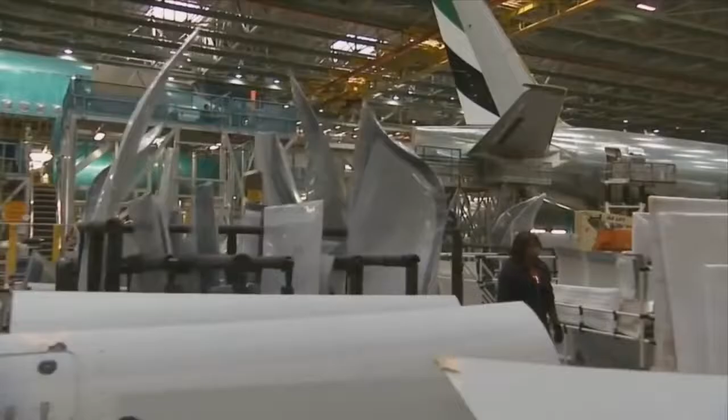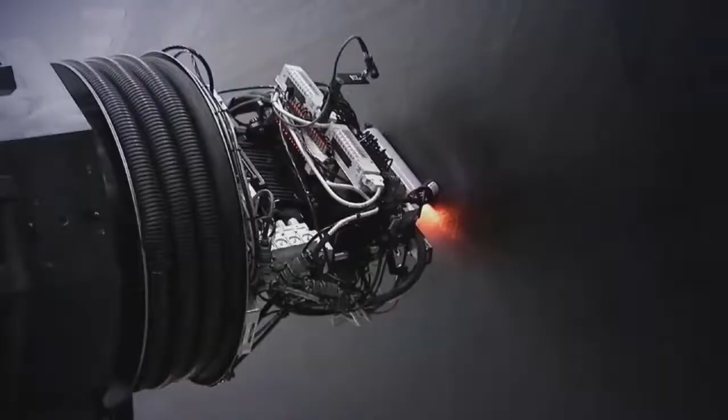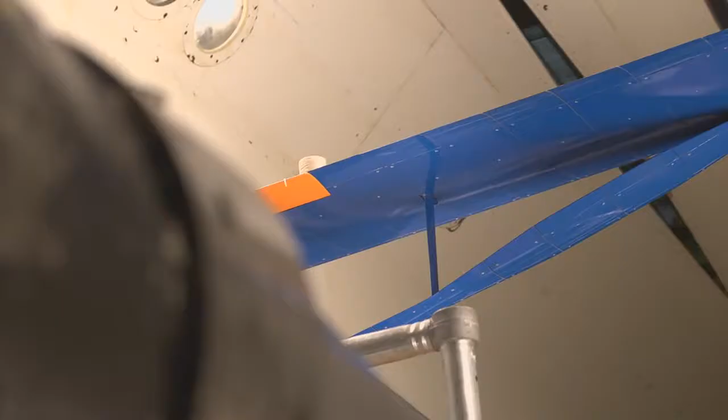With this commendable record, it would be easy for aircraft manufacturers to rely on the status quo and continue to build the same types of safe, efficient, and dependable aircraft for the foreseeable future. But the status quo just won't do. Changes in technology, materials, and scores of other areas continue to unfold that will make future aircraft better in virtually every way. These changes won't come easy, though. Researchers in both the airline industry and government spend years looking over new designs and ideas to make sure that they will work perfectly.

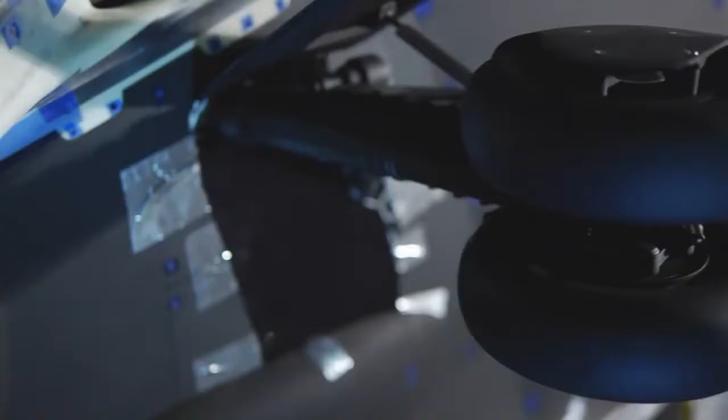This collaboration between industry and government is important because government researchers can help mature new ideas that will eventually be picked up by its industry partners. But if aircraft are already this good, what areas need to mature to make them even better?

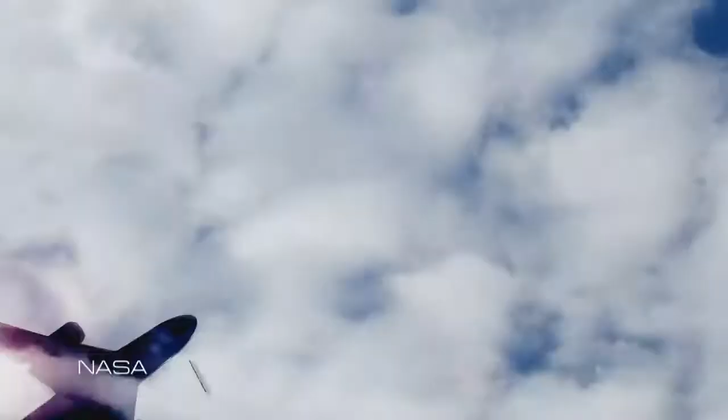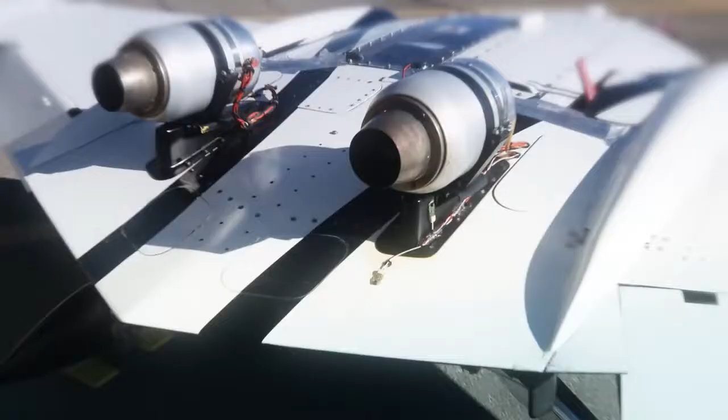Today on NASA X, we will see how industry and NASA are working together to make aircraft quieter, greener, and more fuel efficient. We will follow members of NASA's Environmentally Responsible Aviation Project as they work with industry engineers to develop the aircraft of the future that are substantially different in form and function from the aircraft that we fly on today.

If you were to book a flight today and there were multiple options for airlines to go to your desired spot, generally what would be the key decision point for booking that particular flight? For many of us, the deciding point would be cost. There are certainly other factors that would go into that decision, but more often, cost wins out over other concerns.

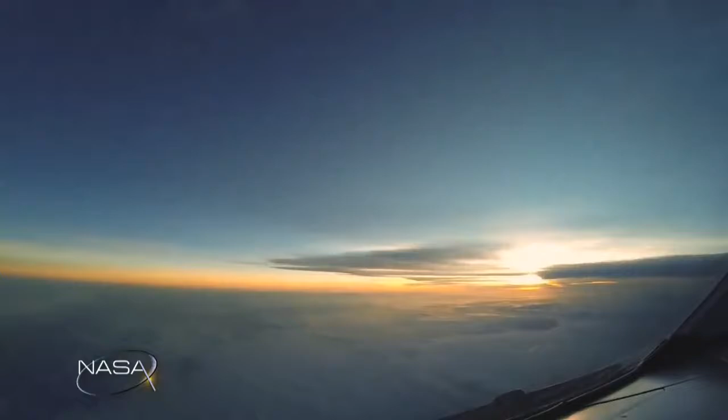Clearly, the airline industry is a business, so keeping costs down to lure more passengers is a huge driver. Airlines are very good at understanding the economics of flight, but one of the biggest fluctuating costs comes from gas prices. If gas prices go up, then generally ticket prices rise as well. One clear way for airlines to combat big fuel bills is to fly aircraft that are more efficient and use less fuel. And theoretically, ticket prices should go down as well.

This push and pull has been going on for years. Though it may not seem like it, flying today is dramatically less expensive than it was even a few decades ago. Adjusted for inflation, a ticket today will cost on average about 40% less than a ticket would have in the 1950s. There are many reasons for this change, but one in particular is that aircraft of today are significantly more efficient than those of the recent past and are continuing to improve every year.

With that efficiency, there are added benefits as well, like reduction in air pollution and noise pollution, and even an increase in safety.

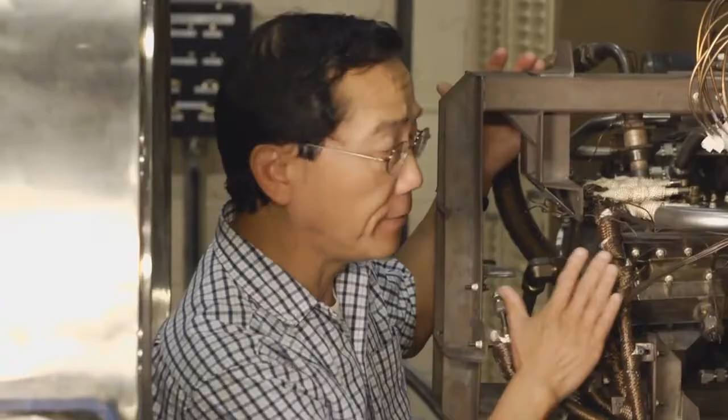To help keep this trend moving forward, NASA made steps in 2009 to continue its place as the world leader in the study of efficient aircraft. They implemented a project called the Environmentally Responsible Aviation Project in a bid to explore aircraft concepts and technologies that will continue to reduce the impact of aviation on the environment over the next 30 years.

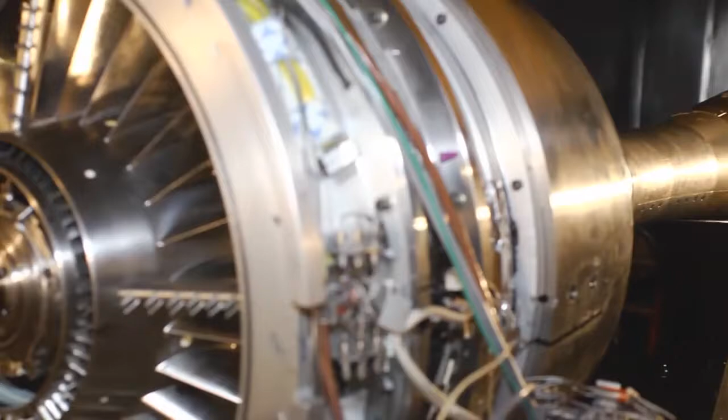During the first 3-year phase, engineers assessed dozens of areas of environmentally friendly aircraft technologies. With these assessments in hand, they then took some of the most promising technologies and began looking at how they would react in a real-world environment.

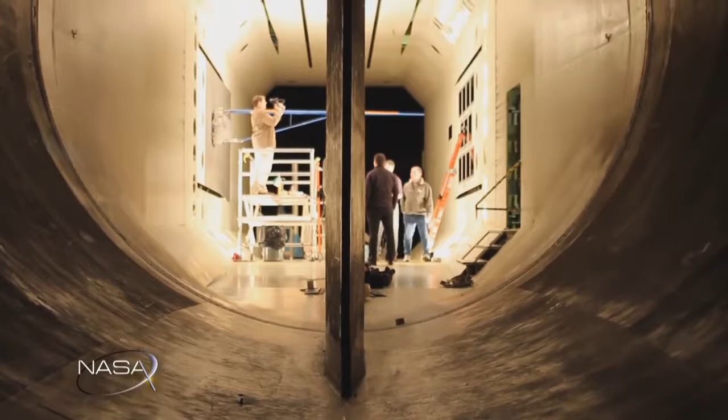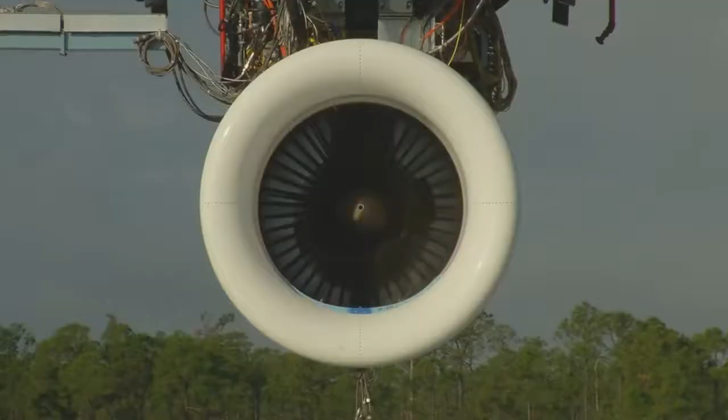Some of those experiments included non-stick coatings for low-drag wing designs, laboratory testing of a new composite manufacturing technique, advanced engine testing, and test flights of a remotely piloted hybrid wing body prototype.

After the first 3 years of testing, the verdict was in. The ideas that were studied proved to be incredibly successful in making very quiet aircraft with low carbon footprints.

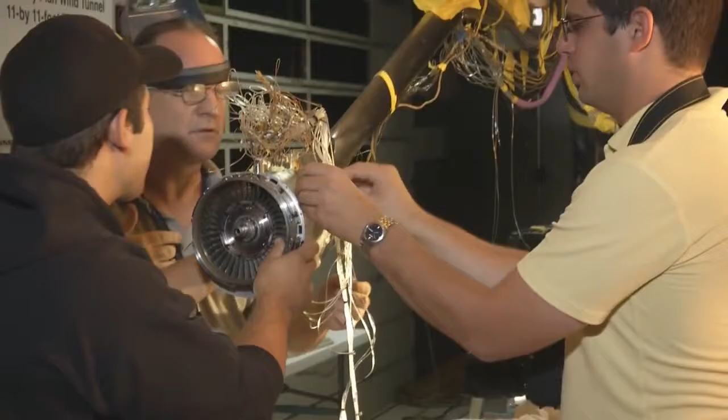The ERA project engineers have taken the valuable lessons learned from Phase 1 and are now beginning to integrate these ideas together to make an even larger improvement in the next phase of testing. In Phase 2, NASA has chosen 8 large-scale integrated technology demonstrations to advance ERA research. The demonstrations are designed to further the project's goals of simultaneous reduction in the amount of fuel used, the level of noise, and the emissions produced by tomorrow's aircraft.

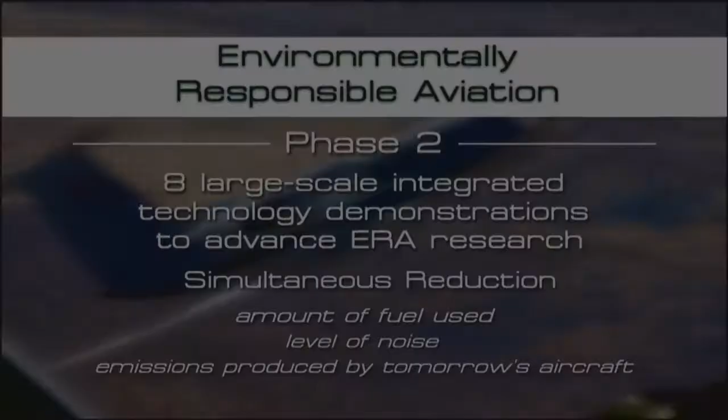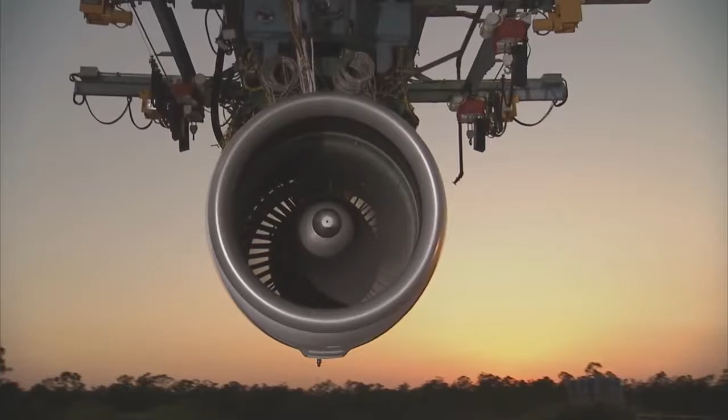Researchers will focus on 5 areas: aircraft drag reduction through innovative flow control concepts, weight reduction for composite aircraft structures, fuel and noise reduction from advanced engines, emissions reductions from improved engine combustors, and fuel consumption and community noise reduction through innovative airframe and engine integration designs.

ERA from the beginning in 2009 had some very aggressive goals relative to fuel burn: a 50% reduction in fuel burn; noise, 42 decibels less than Stage 4 noise; and for emissions, 75% less than the CAEP 6 emission standards, which are international standards. So lofty goals that they've been working at.

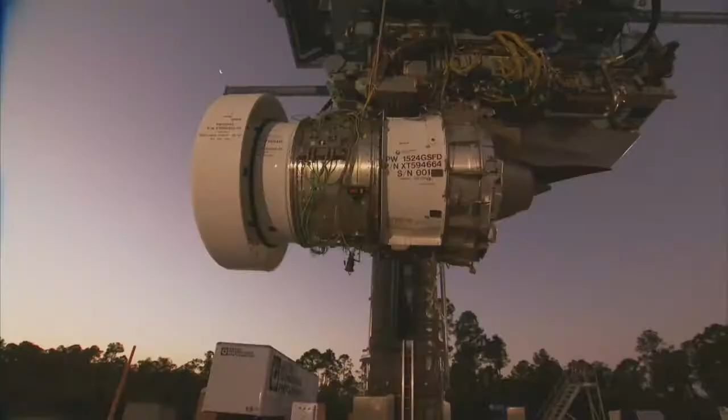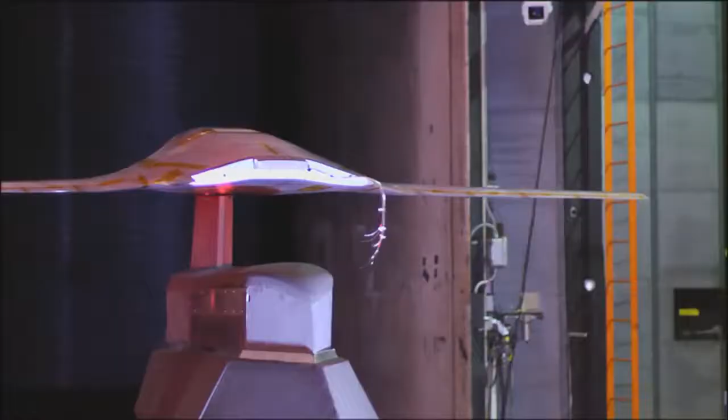And during the first phase, they did a lot of exploratory investigations that could look at all of these technologies working together to see what the probability of outcome would be. So out of that first 3 years' work, they came up with 8 investment strategies, integrated technology demonstrations to invest in. And these aren't aircraft dependent necessarily.

So they could work on something like what we're doing now, doing risk reduction work for a test that will be looking at a blended wing body configuration, a fairly advanced configuration. But many of these technologies will work on current configurations that we see flying right now.

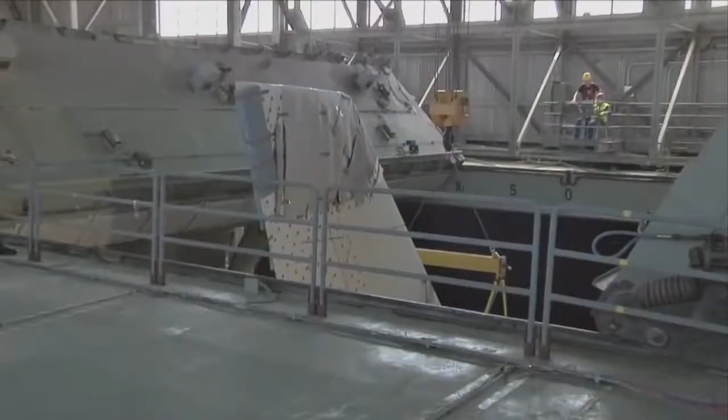Across the street in the National Full-Scale Aerodynamics Complex, we've got a test that would be flown on a 757 Eco Demonstrator. As Dr. Waggoner mentioned, testing active flow control has been completed on the vertical tail section of a 757 here in the National Full-Scale Aerodynamics Complex, or NFAC.

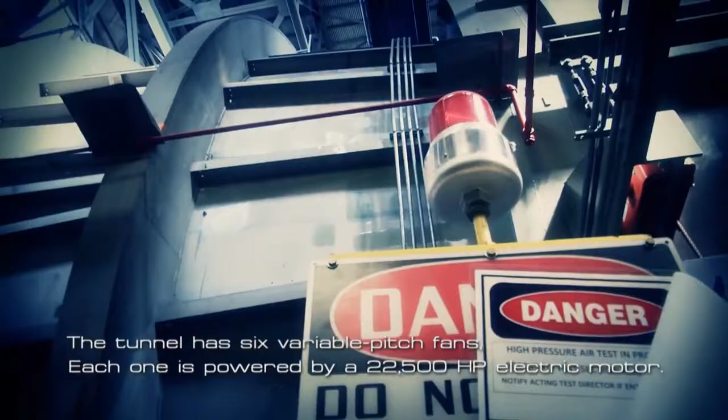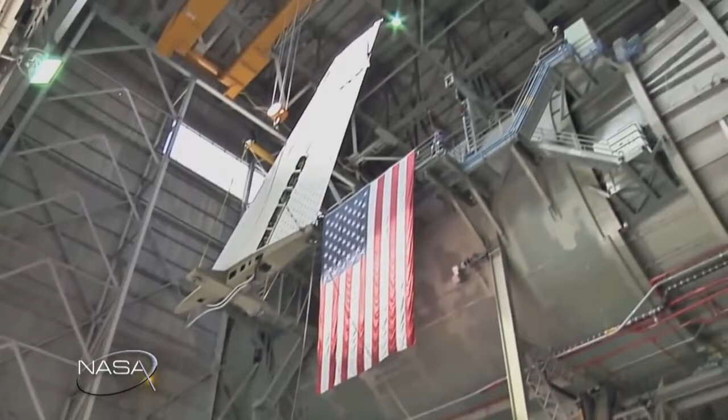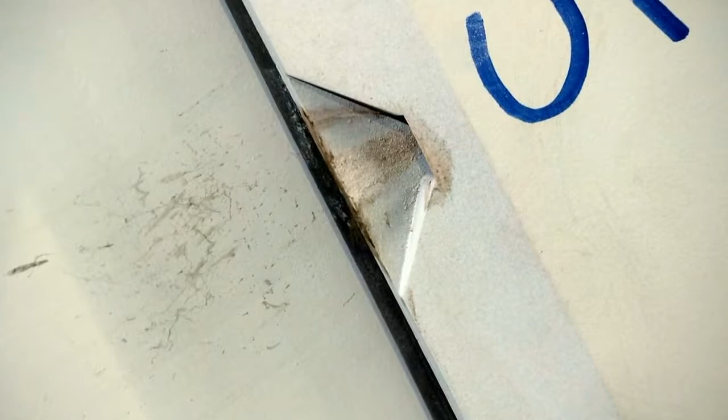The NFAC is the largest wind tunnel in the world and is uniquely qualified to test full-scale configurations like this. This vertical tail section was taken off of a Boeing 757 and fitted with active flow control jets before it was brought into this facility. Now that it's here, researchers can begin the hard work of understanding if this unique technology is viable on aircraft.

To understand what is being tested, let's first look at how the tail section of an aircraft works. Here is Boeing's Ed Whalen to explain.

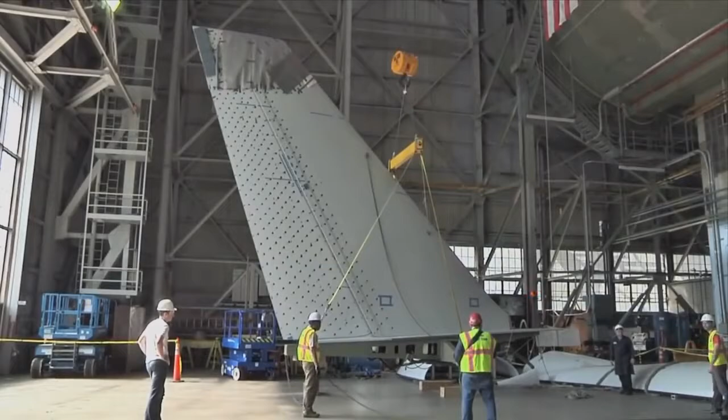So the vertical tail on a commercial aircraft serves several purposes. The purpose that we're focused on here is dealing with the situation when there's an engine failure on the aircraft. It turns out that the vertical tail is sized largely because of this engine failure condition. And so when the engine fails, in like a twin engine airplane, there's a large thrust asymmetry because one engine will be at high thrust and the other engine will be at 0.

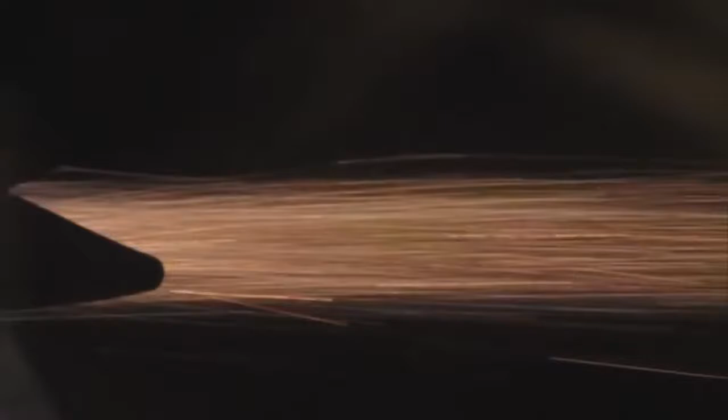And the rudder and the vertical tail is there to straighten the airplane out in that situation. So take out that asymmetric thrust, the moment that that asymmetric thrust creates, and allow the airplane to fly straight and land straight on the runway. Most of the time, the airplane is carrying around this vertical tail that is really sized just for this one situation where the engine fails.

It's a very improbable circumstance for commercial aircraft. So all that time that you have that vertical tail, it's sort of a penalty that the airplane pays to carry this around in the case that this emergency happens.

So the idea is that if we can add the active flow control in, we can reduce the size of the vertical tail. And so we're not carrying around that extra penalty of this bigger tail. We're carrying around the right size tail for normal aircraft operation, and we're turning on the active flow control in an emergency situation or in another situation where high vertical tail or rudder authority is required.

As Ed mentioned, commercial aircraft are designed with a large vertical tail and rudder for maneuverability and an emergency engine-out scenario. Because engine stalls are such an infrequent occurrence, the weight of such a large rudder makes the aircraft less efficient. The basic principles of flight include lift, drag, thrust, and weight.

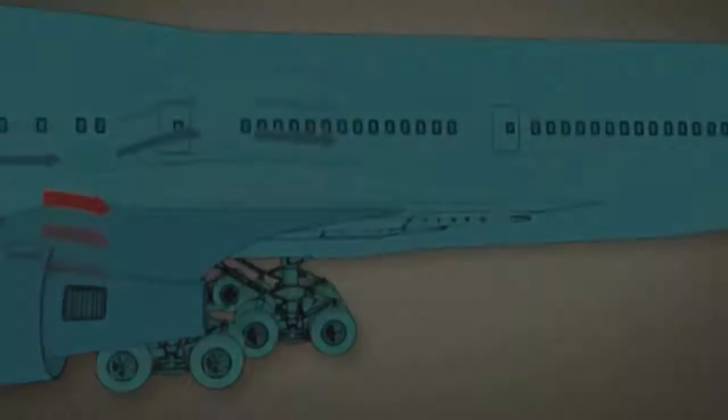In order for an airplane to fly, thrust has to equal drag, and lift has to equal weight.

If you can reduce unintentional drag, then you can make your aircraft more efficient. But the plane still has to operate with an emergency engine-out procedure.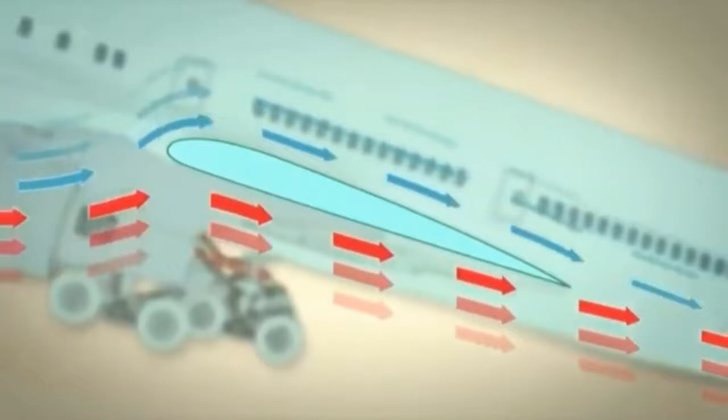Smooth air must flow over an aircraft's surface for it to perform optimally. Researchers have added active flow control sweeping jets to ensure that sufficient air is flowing over aircraft surfaces.

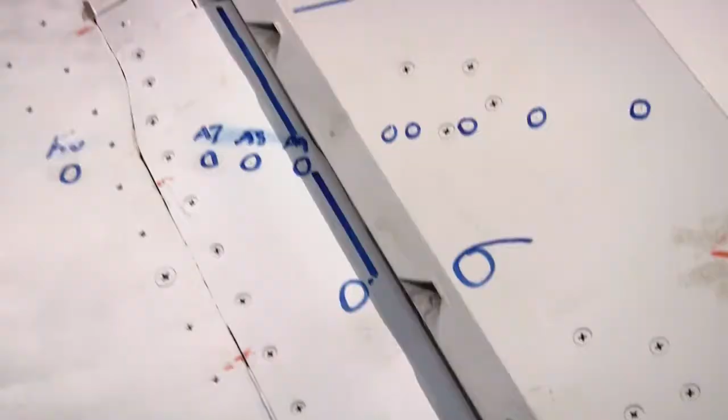What the active flow control tries to do is add energy to the flow, in this case through the sweeping jet actuator, and when it does that, it reduces the separation on the rudder. So when the rudder is at a high deflection angle, like 30 degrees, it starts to experience some flow separation, and that reduces its ability to create aerodynamic force. So what we do is add these jets in the right place with the right spacing and the right mass flow levels, and that reduces the separation on the rudder and allows the tail to provide its maximum potential aerodynamic force.

What we're using to generate this effect on the aerodynamics around the tail is something we call sweeping jet actuators. The way they work: pressurized air comes in, and then it flows through. There's a feedback channel that makes the jet oscillate as it comes out of the nozzle. On the model here, you can see these jets are positioned along the rudder hinge line.

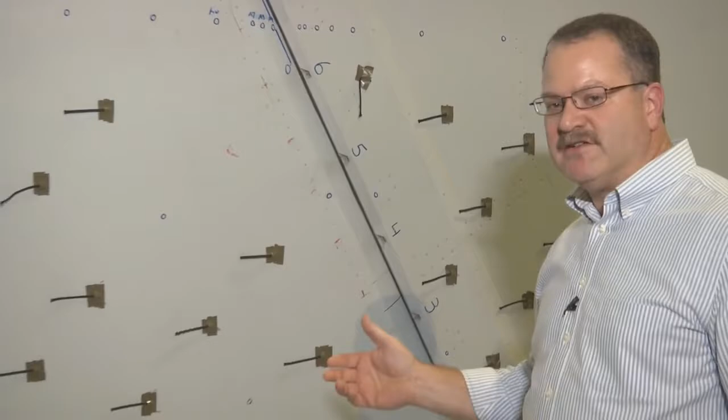The air comes through there and flows, making the effect we're looking for to cause the change in side force. The string taped on the rudder helps show what direction the air is moving as it moves over that surface. Since we can't see the air itself, this is a way to visualize what's going on.

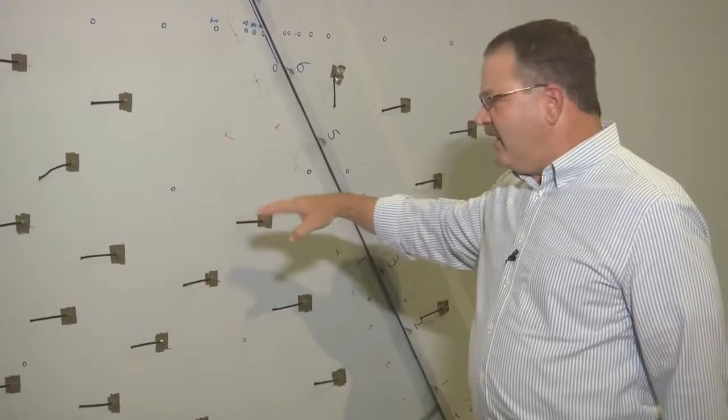As we turn on the actuators, you'll see these change direction. Near the actuators, they'll oscillate because the actuator itself is oscillating, but also because the flow coming downstream is separated until we turn the actuators on, and then it changes the patterns that you see.

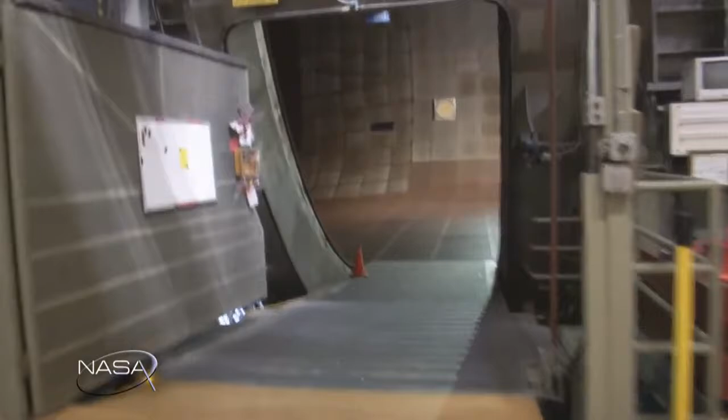Investment needs to be made now to realize these benefits in the future. ERA is set up to really look at ways to help protect the environment. The technologies we're working on in this specific instance will end up causing less drag on aircraft, which results in less fuel burned. That's obviously a benefit in terms of emissions as well as an overall economic benefit for the airlines.

After the analysis was completed, the wind tunnel tests conclusively showed that the goal of a 20% increase in side force was achieved with the active flow control jets.

Research will soon begin to focus on validating these results on actual flight tests in the near future. If you think about it, that's been a full-scale hardware-in-the-loop simulation we've just done. We'll take that hardware and apply it to a 757 that's been leased for this experiment, and we'll go fly it and see if the performance we can demonstrate in flight is consistent with what we measured in the 40x80 at NASA Ames. We're confident it will be, and we're looking forward to the experiment.

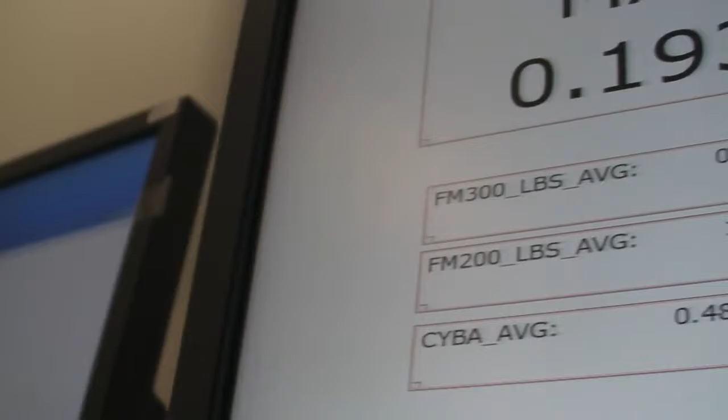So we've seen how testing is performed on full-scale aircraft parts, but researchers also test small-scale and computer models as well to better understand how to improve aircraft performance.

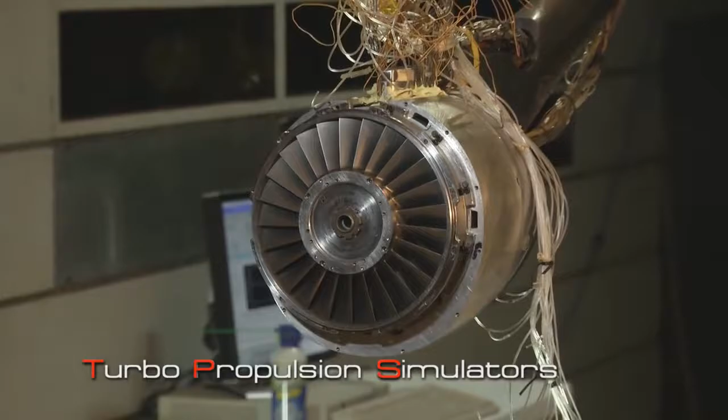Here at the 11-foot tunnel at NASA Ames, researchers are looking at turbo propulsion simulators, or TPS units. The hope is that these tests will help better understand how moving engine configurations may fundamentally change aircraft design, while also making it more efficient. Here is NASA's Kevin James to explain.

One of the big problems with the next generation of airplanes is how do you actually integrate the propulsion system with the aircraft? We call that PAI, or propulsion airframe integration. The problem is the engines have gotten to be so big, which is why they're really efficient, and it's also why they're quiet, is actually their size.

Their size is approaching the tube diameter of the airplanes that they fly on. If you look at a 737 and the size of the engines hanging underneath the wing, they're approaching the size of the fuselage that we ride in.

So a big problem is how do you take these engines and integrate them with the airframe itself? How do you get the airplane to fly as a cohesive unit?

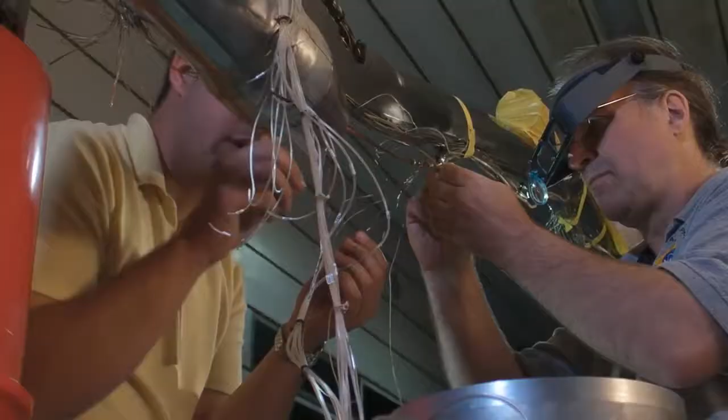One of the problems we're looking at in our propulsion airframe integration problem is an entirely new aircraft concept, where the engines are actually going on the upper surface of the wing. That does a variety of things.

If you look at an existing aircraft, the engine diameters have gotten so big that the only way we can make them bigger is to shove them up into the wing, which causes real problems with how the wing works.

Or we put longer landing gear on the airplane. But if you look at the trade-offs, the cost of carrying the weight of that longer landing gear around for the life of the airplane doesn't actually pay for putting bigger engines on it. So putting bigger engines underneath the wings is a real problem, especially for smaller aircraft.

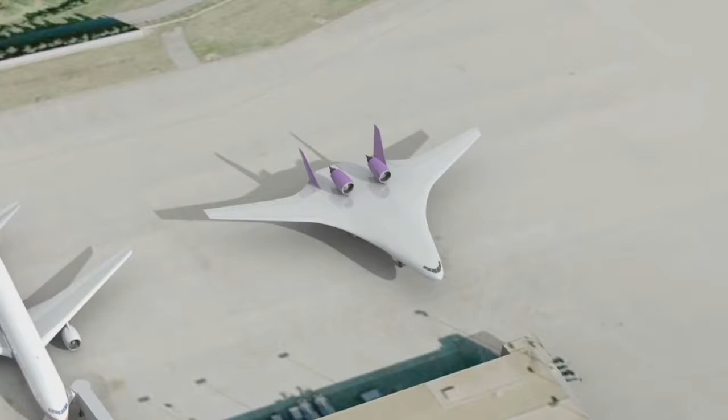So now we're working on putting the engines on the upper surface. The problem is it's the upper surface of the wing that actually does the work that produces the lift that allows you to fly. So if you aren't very clever about how you integrate the engines on the upper surface of the aircraft, you totally destroy its ability to fly efficiently.

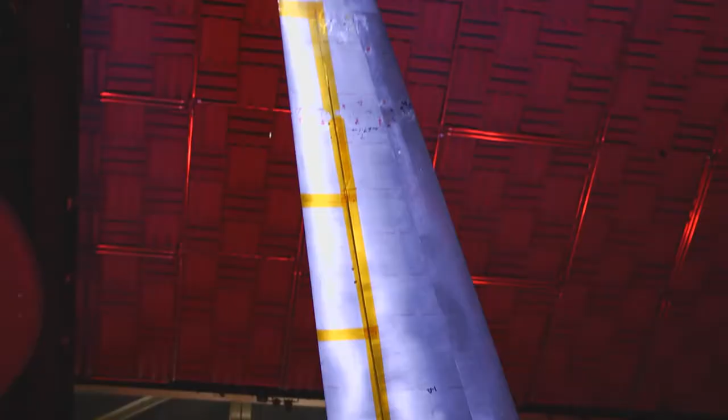Understanding this issue, NASA researchers have been testing hybrid wing-body aircraft that could revolutionize flight.

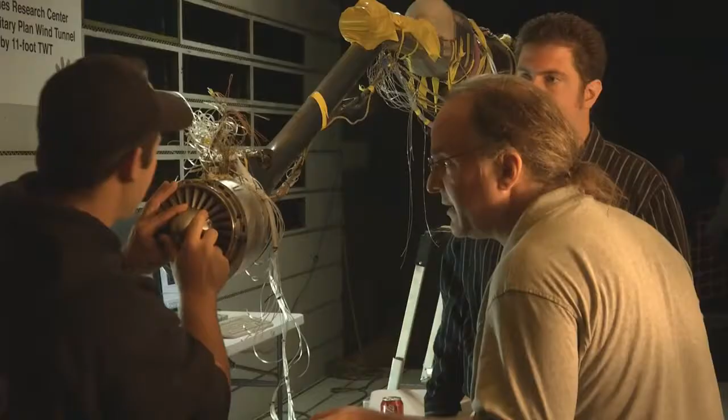In addition to flying models in the desert, researchers are also putting these TPS units to work in wind tunnels to better understand how new engine configurations will work with these innovative designs.

Well, this looks like a little jet engine, and that's actually kind of what it is. It's a small jet engine that runs on high-pressure air instead of kerosene or Jet A. We do this because it's actually a problem to burn kerosene in the wind tunnel environment. It makes a mess. So we use these to simulate jet engines on real aircraft.

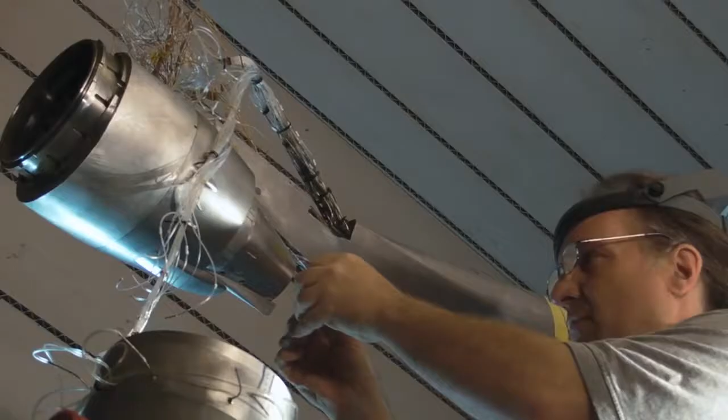These turbo propulsion simulators, or TPS units, are being set up and developed for testing on a hybrid wing body or blended wing body platform that's part of the ERA program. There will be two of them, mounted on the upper surface of the aircraft towards the aft, between the tails. These units will simulate the way a real jet engine would perform on the real aircraft.

But we're doing it all at model scale, in a wind tunnel environment where we can measure the forces and the moments and the off-body flow fields.

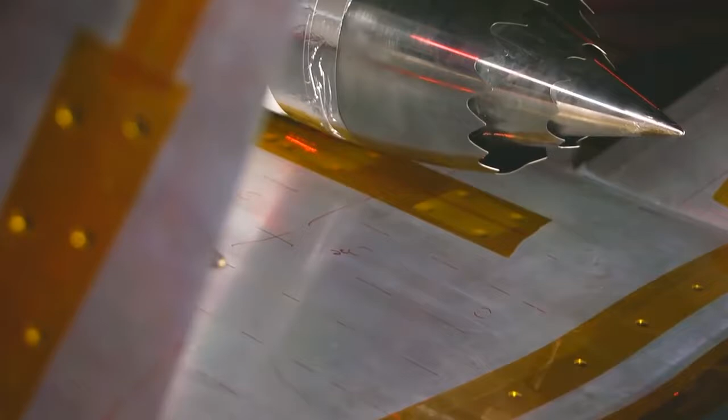Part of this research is also helping engineers better understand what future aircraft will look like. I'd say the future's wide open. There's a lot of good places to put engines. There's a lot of good ways to design airplanes.

If your goal is to improve fuel economy and reduce emissions, there's a variety of ways we can go after it. Some of it is looking at advances in propulsion, trying to improve the efficiency of the combustors, trying to change the emission characteristics of our engines. Like I said, there's some low-hanging fruit in how you actually integrate that engine with the airframe.

And it turns out that if you're really clever about this and do a good job, you can produce an airplane that's more efficient with the engine cleanly integrated than the aircraft without the engine at all.

The hope is that if you present the American people with airplanes that don't look like airplanes, that aren't necessarily a tube and a wing, or even a conventional looking jet engine, these are still perfectly valid airplanes. They may actually be better airplanes than what we have today, allowing you to travel farther and faster and cheaper, with fewer emissions and cheaper tickets.

I think the way airplanes look are going to change for sure in the next 25 years, and I hope that people are willing to accept that these changes are progress.

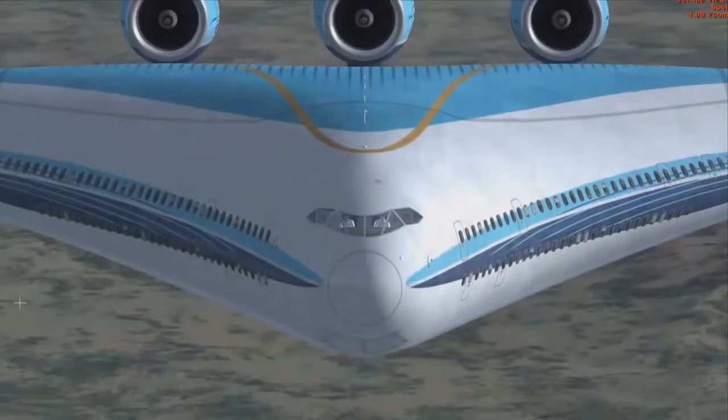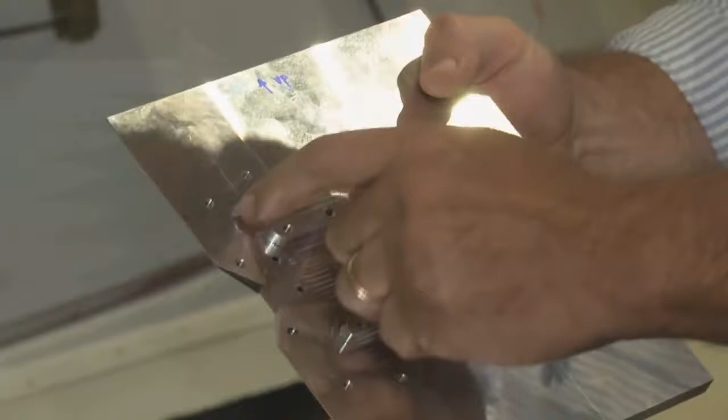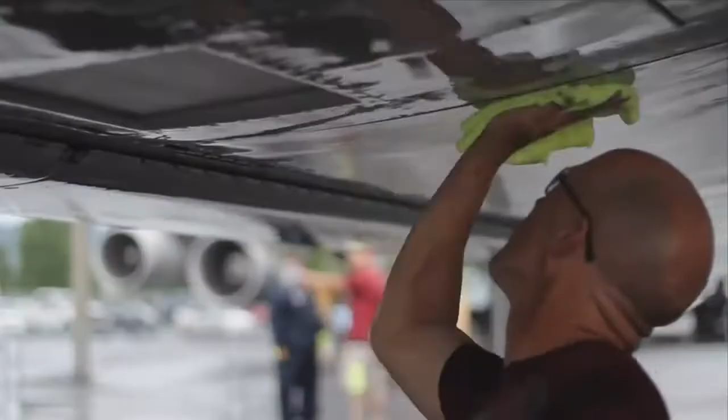As we have seen so far, there are some unique and cutting-edge ideas on the drawing board for making aircraft more efficient. Irrespective of whether you are flying today or 30 years from now, aircraft will always have to contend with external issues like weather and other environmental factors in the goal to become more efficient. What may come as a surprise is how seemingly innocuous items like dirt and even bugs can cause an aircraft to become less efficient.

To understand this, let's think back about the four forces of flight. When air passes over the aircraft wing, the aircraft will rise. The goal is to have what engineers call laminar flow over the wings - air passing over the wings evenly, without any turbulence. When areas of the aircraft's leading edges do not allow air to pass over them smoothly, it causes more drag and turbulence, which in turn makes the aircraft less efficient and forces it to burn more fuel.

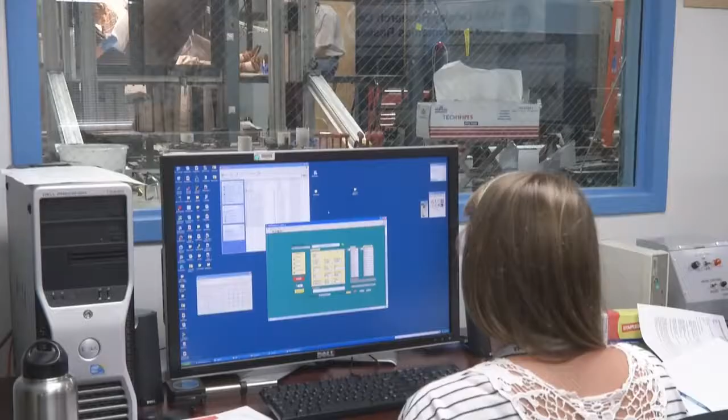Believe it or not, even the smallest of bugs hitting a wing can cause the aircraft to become less efficient. Researchers here at NASA Langley are attempting to solve this problem by testing new aircraft coating that won't minimize bug strikes, but will prevent the bug residue from sticking to the aircraft's surface.

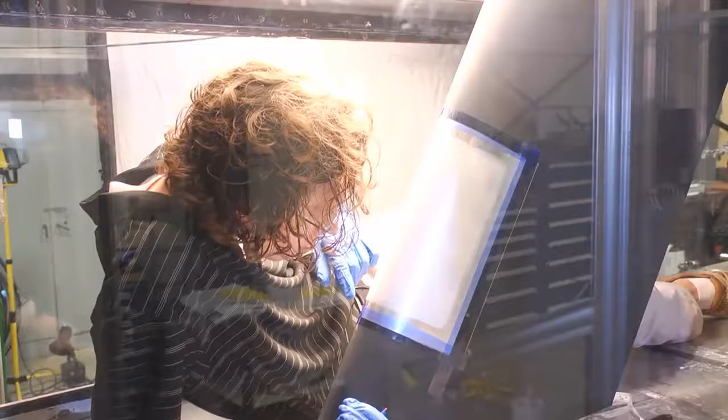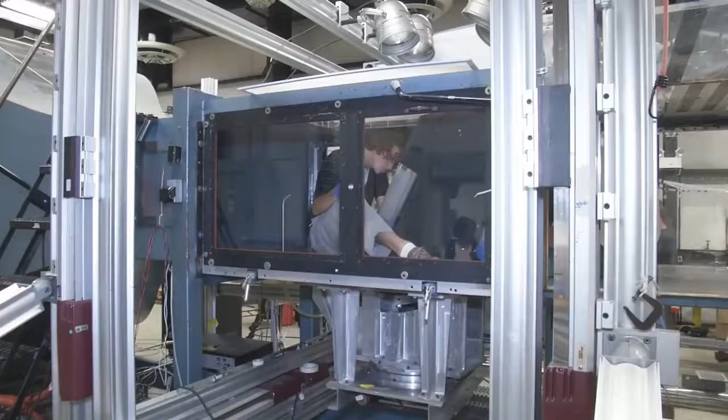What we're doing here is we're developing some engineered surfaces to prevent bugs from sticking to aircraft wings. This work is actually part of a project called the Environmentally Responsible Aviation project. The objective of this is to prevent bugs from sticking so that we can enhance or maintain laminar flow over aircraft wings. What that means is that we're preventing turbulent flow so that you have more efficient aerodynamics.

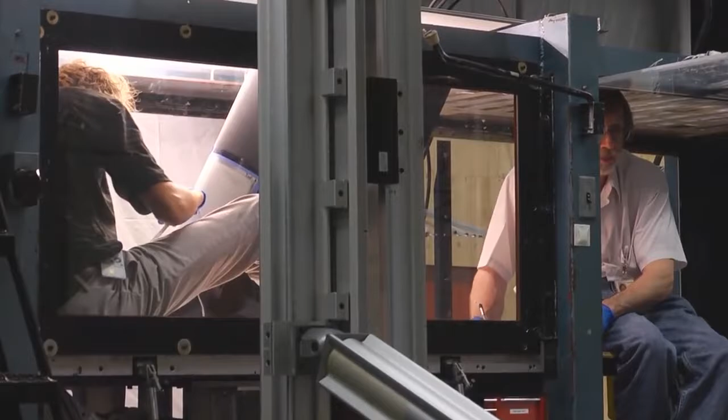What we're doing now is testing it in a more realistic environment where we're simulating takeoff and landing conditions. That's why we want it in the wind tunnel. We actually designed a gun so we could shoot bugs at it and see how effective the coatings are.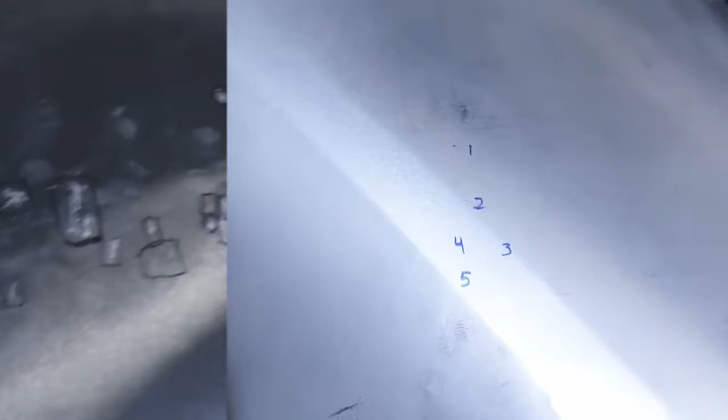What we're trying to do is prevent the residues that are sticking up from tripping the laminar flow, so you have laminar flow instead of turbulent flow. When that happens, especially during cruise when you're flying long distances, because the aerodynamics are more efficient, then you actually burn less fuel.

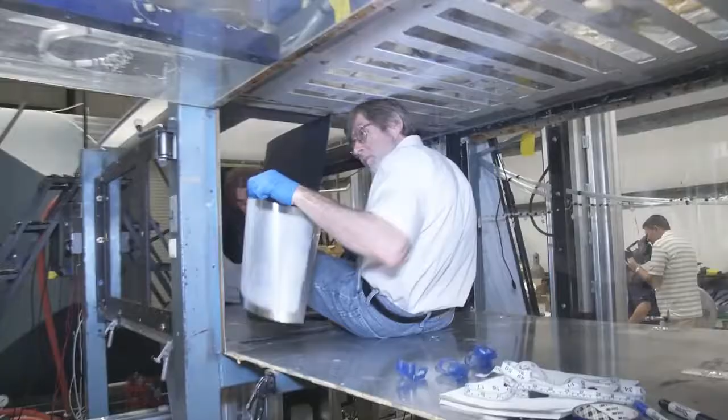We started looking at commercial coatings just to make sure we're not missing any of what's already effective out there. Between the commercial coatings we've looked at and new coatings and surfaces that we've engineered and modified, we've looked at about 60 different surfaces. The hope is that we can get the most effective surfaces down selected and develop further for application. From that set, we're looking at perhaps down selecting to about 3 that we could investigate further.

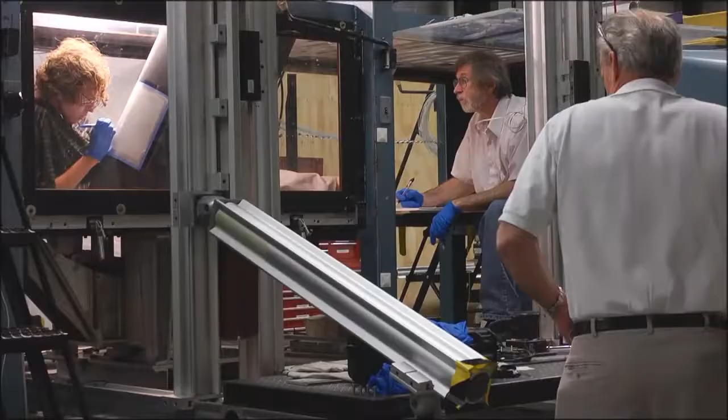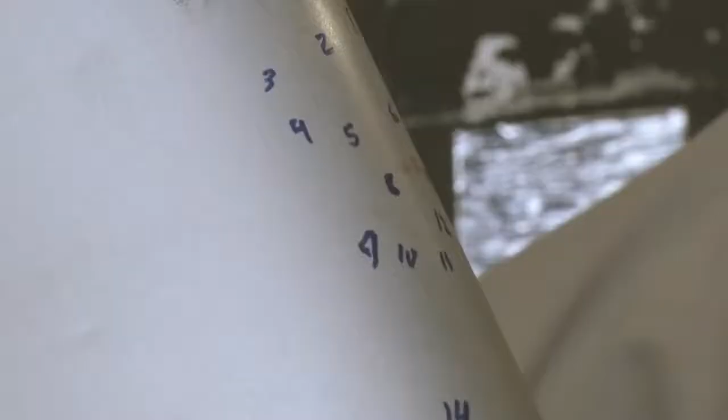Research continues on this project, and so far the results seem very promising. NASA is not settling for the status quo and is in fact pushing forward in many new directions, from seemingly innocuous bug strikes all the way to full-scale testing on aircraft. The researchers of the Environmentally Responsible Aviation Team are leaving no stone unturned in an effort to push the boundaries and find ways to make aircraft of today and those of tomorrow as efficient as possible.